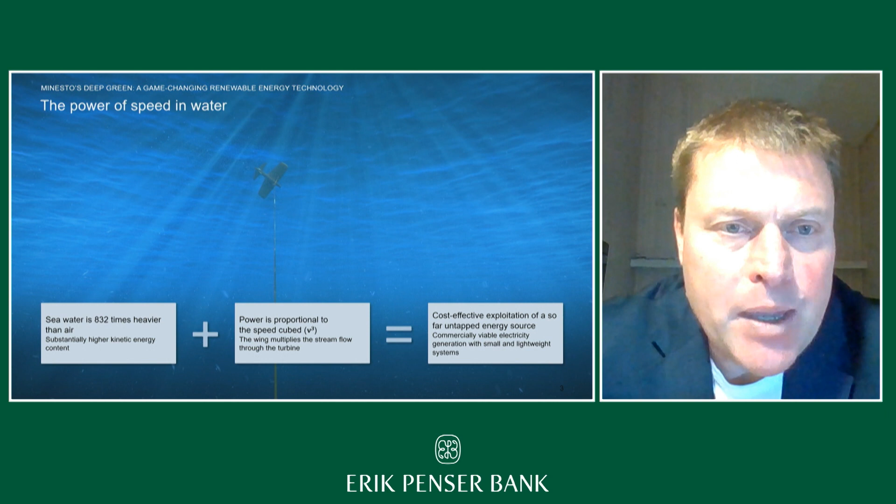But let's move on and talk a little bit about the technology until we reach that. So if I can get the next slide, please. I hope that the animation reaches through to you, because it will show you the principle that we're using.

We design and build underwater airplanes with an onboard drivetrain with a turbine and a generator. So you can say the nacelle and the turbine generator gearbox there is much the same system solution as a conventional windmill, just smaller scale and a little bit more robust, and hopefully significantly more watertight.

And this system is then pushed through the water and driven through the water by the airplane that sails with its wing on the current. So it's propelled around in this eight-shaped trajectory by the ocean current that is creating a lifting force on the wing. This makes it possible for us to sweep a large area of the water.

And by sweeping such a large area with a small, lightweight system, we get really good economic generation out of it, because we can sweep that large area.

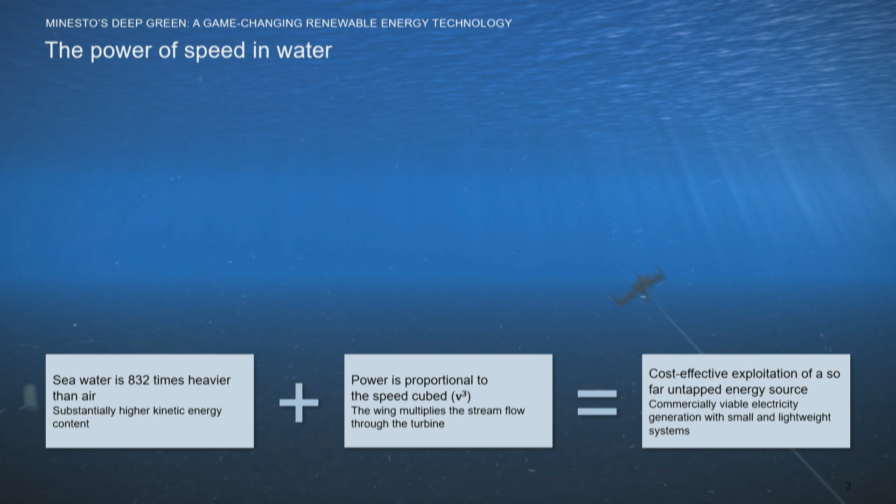And we can also significantly accelerate the speed of the water through the turbine. So if we would just park this airplane on the seabed, we will get perhaps 1 meter per second flow through it. But when we let the natural flow push the wing, the system will move at a speed up to 10 times that speed of the flow.

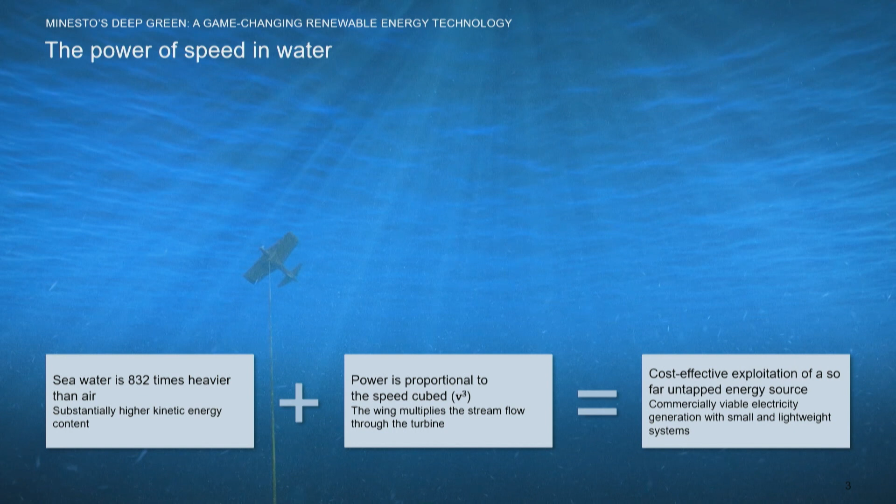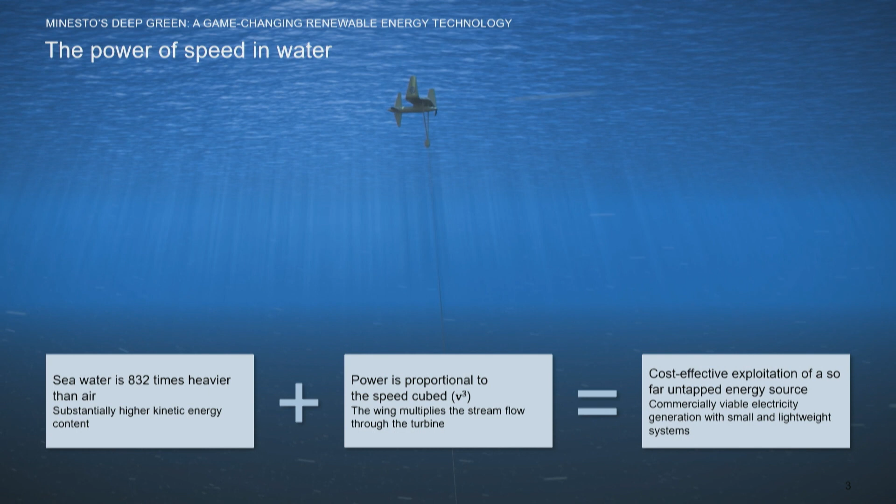And that makes it really interesting from a turbine physics perspective, because there's a cubic relationship between how much energy you get out and how much velocity you have in the water. So all those things taken together are really at the core of the competitiveness of Minesto's technology.

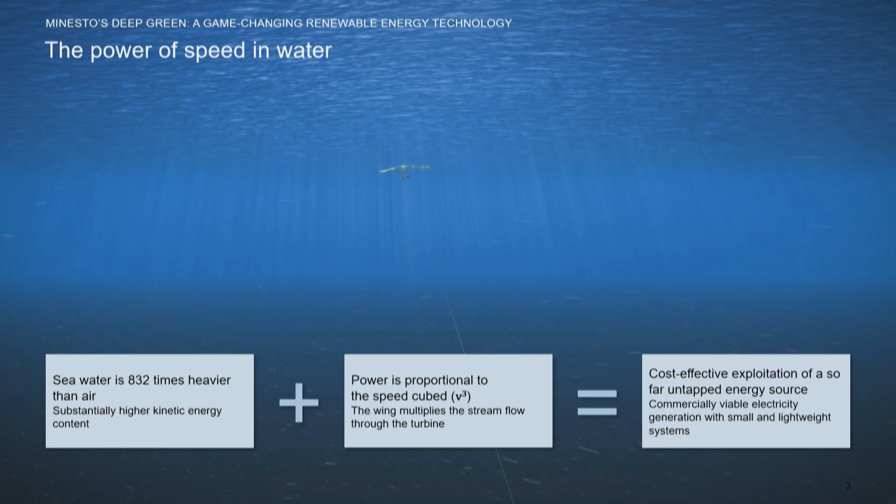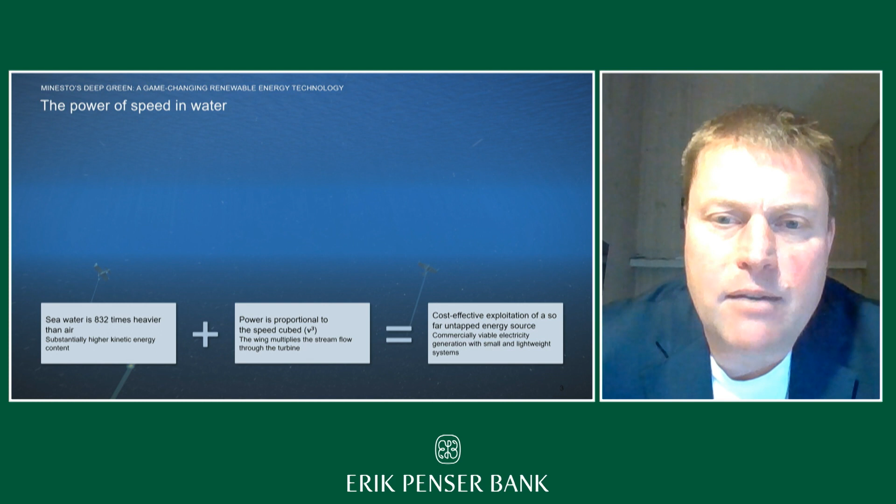So apart from being interesting from a project build-out, sales and commercialization aspect, I think it's fair to say that if you're looking at a high-tech investment that really carries competitive advantage inherently close to the technology, Minesto is such an opportunity. But let's move on.

Let's move into the actual setup. If I get the next slide, please. Just briefly here, this is the site that we operate in the Faroe Islands together with the local utility, the local electric utility there, SEV. So you see the airplane, the underwater airplane, the kite, or the dragon as we call them nowadays, tethered to the seabed.

with a foundation. It can, of course, also be drilled and grouted to the seabed, so we don't have to drag a lot of concrete into the ocean, which is the next natural step of evolution of foundations. And then seabed umbilicals, rather conventional technology nowadays in transporting electricity on the seabed, and then onshore control stations with a connection to the grid.

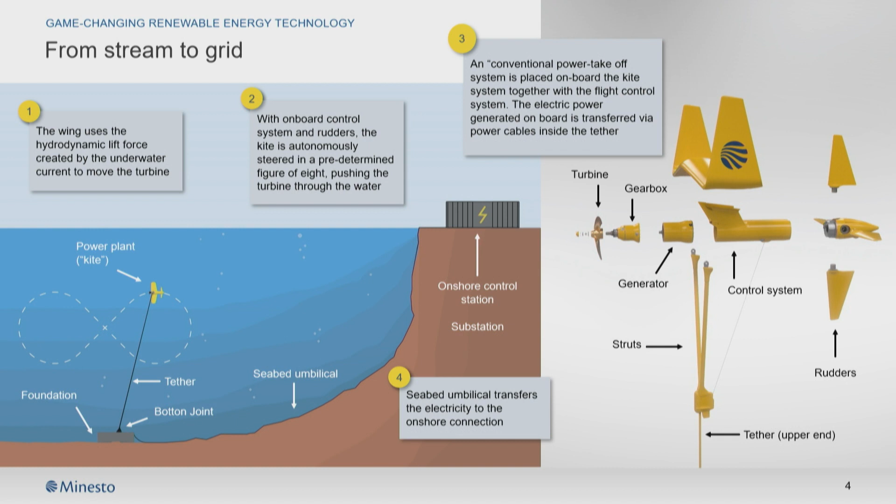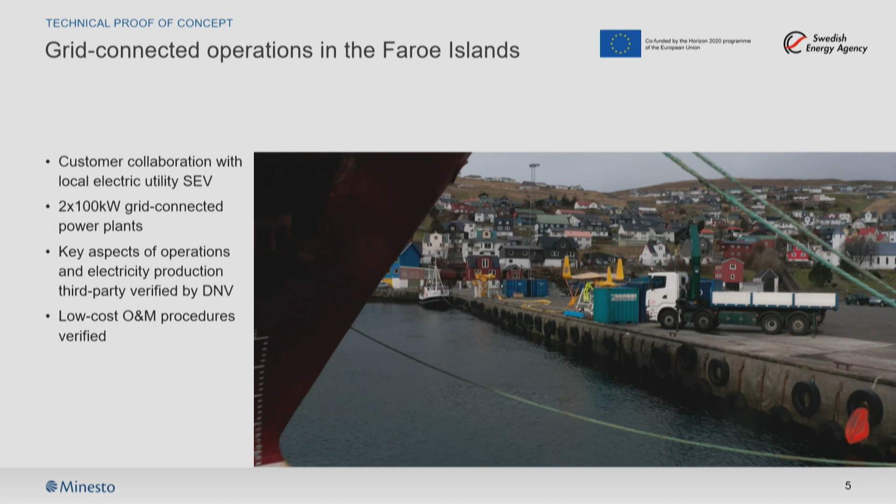So this is the setup that we bring to the table. And if I can get the next slide, we'll move into some nice footage from the actual operations from last year in Vestmanna in the Faroe Islands.

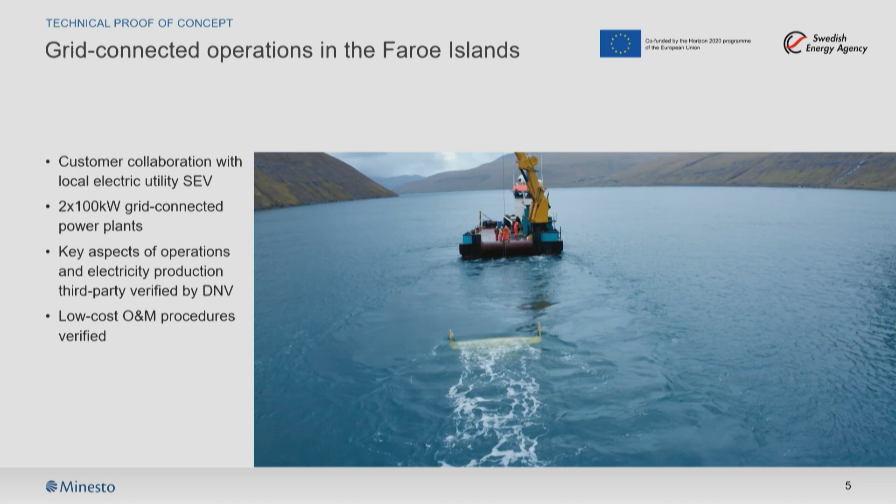Fascinating sceneries, those islands, with a population of 50,000 people and an isolated grid. So they need to be really careful with security of supply and keeping the island's energy system operational under all conditions. And this is a story that will show you some of the value of bringing Minesto's tidal energy technology to a net zero grid mix, or a quest towards a net zero grid mix.

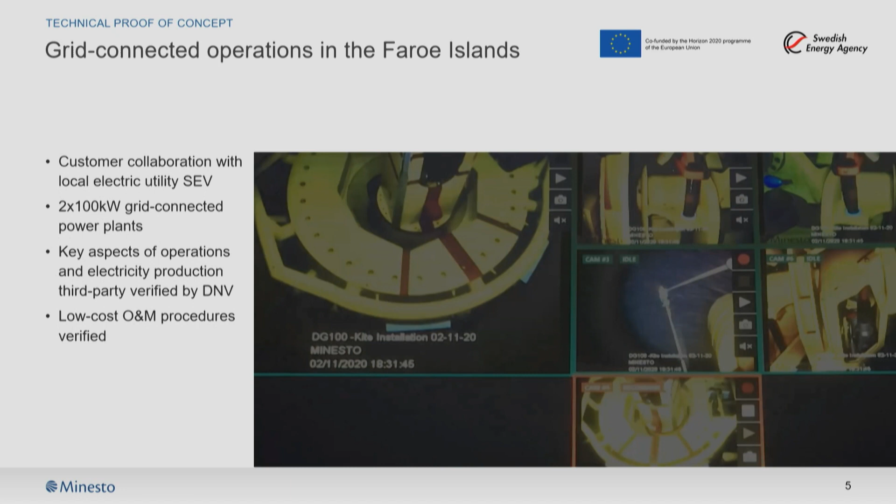And this is what we're doing here in the Faroes. So this utility, they normally don't invest and work with early stage technologies. But given the potential of tidal in the Faroes and its complementarity to wind and the hydro resource they have, it makes this really interesting.

And what we've been running is two kites called DG100s. Those kites are now being upgraded or swapped out into what we now call D4 kites, or Dragon 4 kites, which is a significant step performance-wise for us. And we will use the same infrastructure for those new kites as they are transferred into this grid context this year. Some of the advantages of the technology can be seen in the footage here.

One obvious thing is that we can tow the system out. We don't need to lift it, we don't need large vessels to do it, and that opens up for rather clever, low-cost O&M concepts for working with it. You also see some underwater footage and GoPro camera views showing that the turbine is actually moving and that the system, as you see it here, is in electricity production.

I think we'll move on and introduce you to the Dragon class systems. In the process of maturing the technology, during the last year, what we are now building and what will soon be installed is a significant upgrade of the technology.

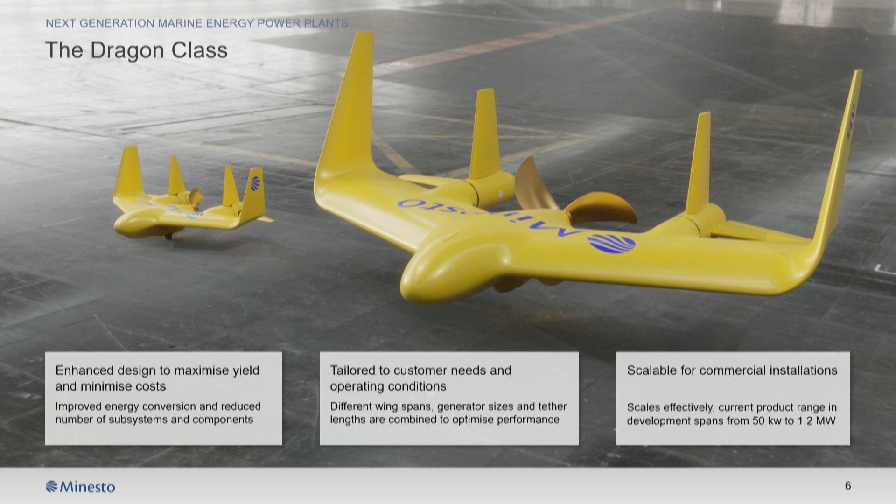And that's the kind of changes that has now pushed Minesto's technology into what is not just a commercial demonstration unit. It's really a product range, and we are now building the first units.

We are building two large units, the D12s that you see here, which are megawatt plus units. And we're building three smaller 100 kilowatt units, the D4s. One of the units we're building with a little bit larger wingspan, but with the same rated power.

The flexibility of wingspan is something we will use to target different flow profiles. I think it's equivalent to the wind industry, where you have longer and shorter blades depending on your peak winds at certain sites, so you can optimize in that way. That's quite a good flexibility dimension for us.

We also reduce the number of components, and as you see, we are now pulling the turbine instead of pushing it through the water, which also has a significant impact on flight behavior and energy production. Okay, next slide please.

Perhaps the most important slide in this presentation: the economic rationale behind this technology. I'm going to spend a little bit more time on this than I perhaps normally do, because sometimes I'm a little bit surprised by the reactions we get when we present this.

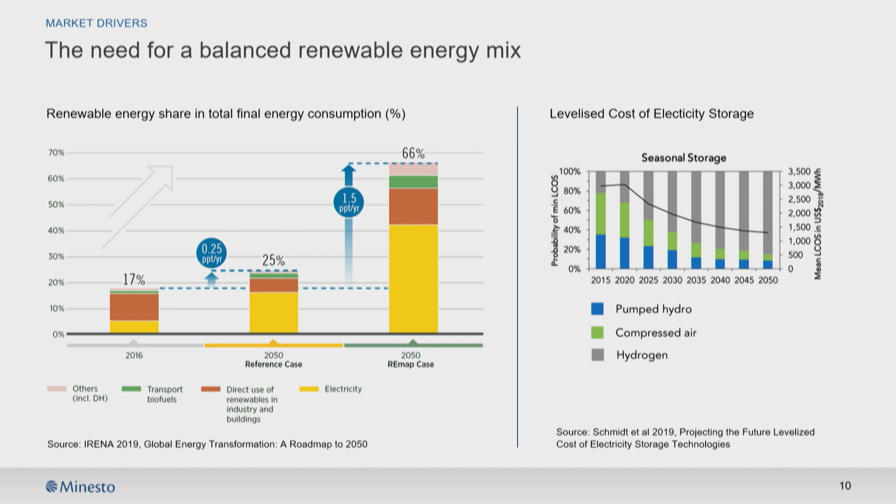And if you give me the next slide, you will see an overview, a comparison from the island of the Faroes here, comparing their storage needs with and without utilizing their tidal energy natural resource.

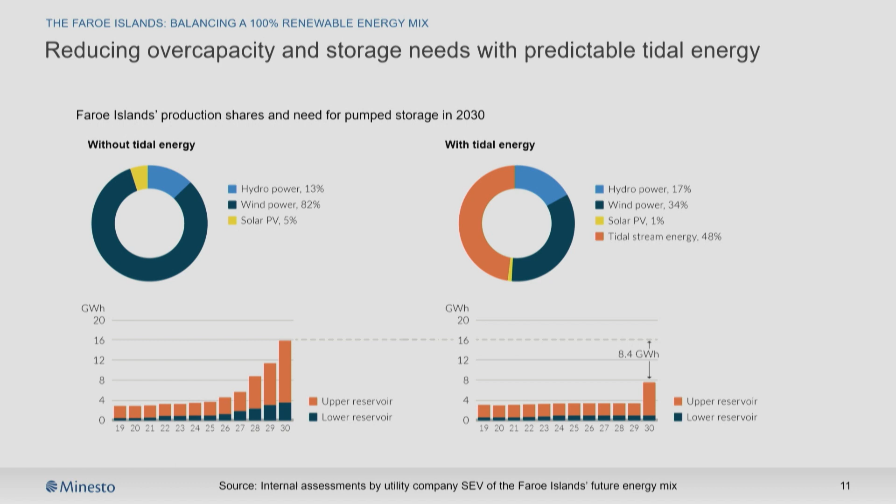And the gap here - it's actually so that we can discuss whether the gap is potentially even larger than this. But this is a first go data from the local utility, where you can see that for them, hydropower and pumped storage, where you pump water back into the dam to run it through the hydro turbines again when it's no rainy days, so to speak, and when the wind is not blowing.

That's the concept here. And it's massive investments in concrete. It's build out of those dams needed at a scale that is almost doubling the capacity, with an enormous carbon footprint and enormous costs associated with it. So that's the wind scenario.

If we can get the predictable tidal energy that runs every day with 4 cycles a day, we reduce this need significantly. It's also a context where we can put farms in different locations where we will have a shift. The tide does not turn at the same time, even in a small place such as the Faroes. So we get a really, really good tool to balance the grid and lower the total capex and introduce a higher security of supply.

And I think this is really why Minesto is having such a good position in the Faroes and so much support locally there. And we will see over the year here new plans and the serious build-out phase being introduced with sites for the D12s to start with.

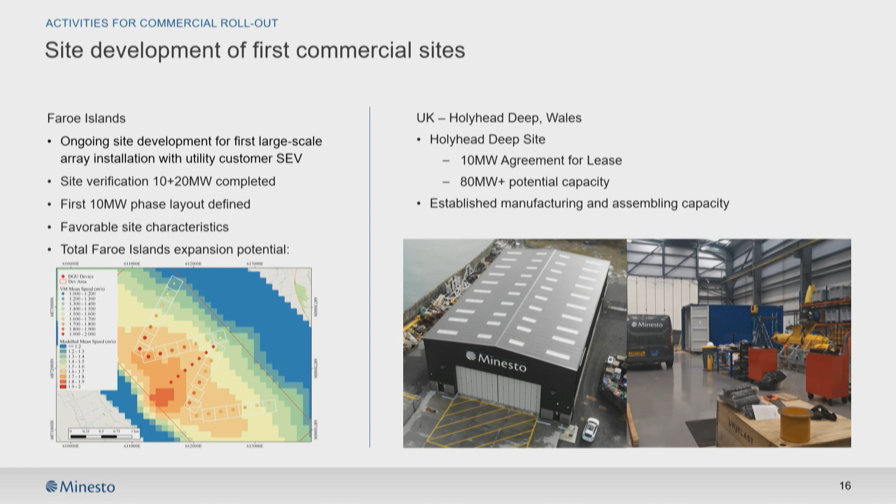The partnerships on the commercial side are of quite significance: one of the world's smallest utilities on one side, one of the biggest on the other, and one of the leaders in this renewable energy transition as a partner for project and system integration with Schneider puts us where we want to be at the moment.

There are probing activities in a lot of areas, and hands-on activities in UK, France, Taiwan, and the Faroes at the moment. We will add to this list over the year with new opportunities. Not necessarily that we'll throw ourselves in parallel everywhere, but we need to be there, understand local market conditions, and venture into potential partnerships. There's huge interest in what we do in areas where they know they have a tidal resource, so we just have to be clever with how we choose and pick in that context.

I think we've already covered the onwards agenda here with what we deliver, what we scale up and expand. For the sake of time, I think it would be really good to invite some questions. Thank you very much for your attention and for listening.